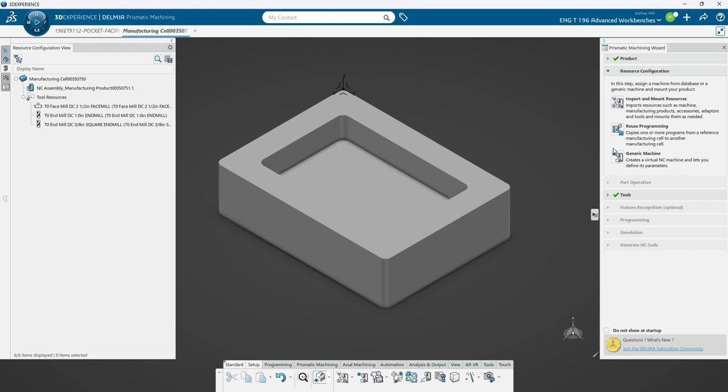So the first thing we're going to want to do is we're going to pick our machine. We're going to grab this generic machine right here. 3-axis will do just fine for this operation.

Next, we're going to want to pick our rough stock. So we'll come in here. Rough stock is going to be basically what's a bounding box, or also known as just the rough stock. You would machine this from a piece of rough stock. You've probably already flattened it and you would just do basic contouring and stuff like that.

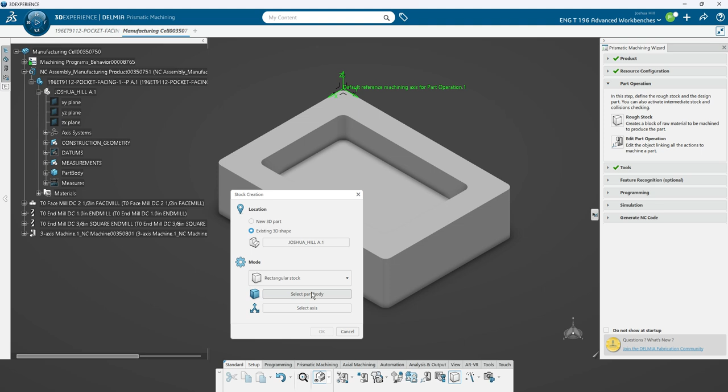Now what we want to do is we want to make this just a little bit bigger. So we can go 8.5 by 6.5, and we're going to make this 2.

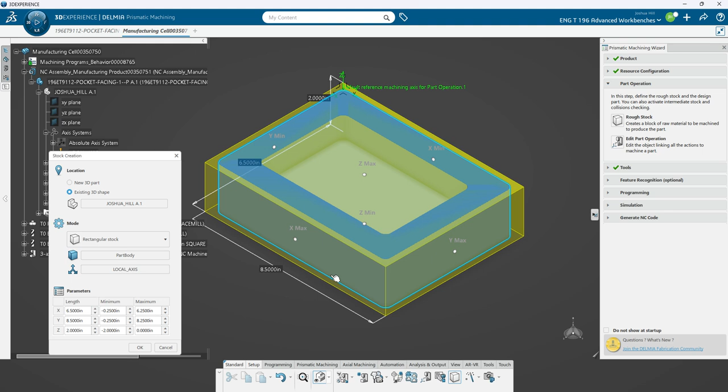And what that's going to do is that's going to create a bounding box, or a piece of raw material around our part, so that we can put this into a vise and machine off the parts that we need to machine off, subtract the geometry here that we need to subtract in order to get our final product.

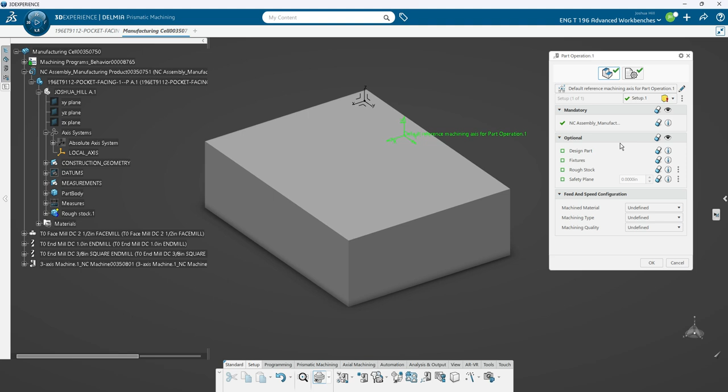So we'll select OK. Next we'll edit the part operation. We're going to select which axis we want the machine to reside on. We're going to pick this upper corner here, right here in our stock, because that's where we want the machine to start.

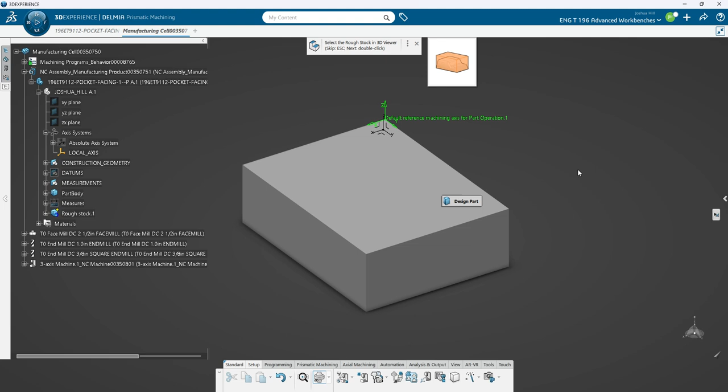Next we're going to pick our design part, which is our part body. Double click off in no man's land. Next we'll pick our rough stock, which is right here, we just created. Next we will pick our safety plane.

This is something I created beforehand. This will let the machine know where to retract back to. And then what we're going to do is we're going to put a -1 inch. I want this machine to come back. I've been having problems with it going through the part, so just to be on the safe side, we're going to put it at a -1.

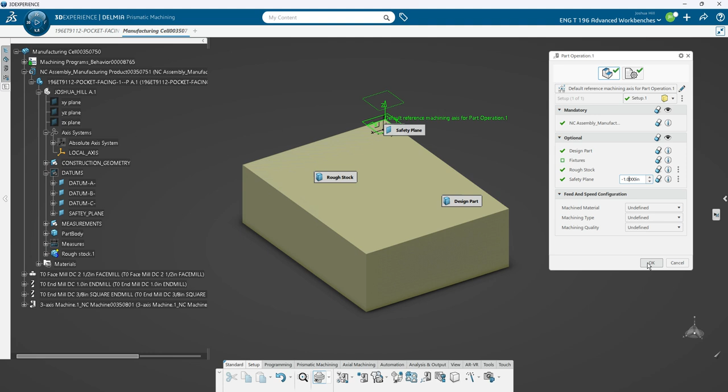Next thing we're going to do is we're going to come down here to our programming. We're going to pick Prismatic Machining, and the first thing we're going to pick is facing. Now here it wants us to pick our tool. So we come over here to the tools that I created, and we're going to use this 2.5-inch face mill.

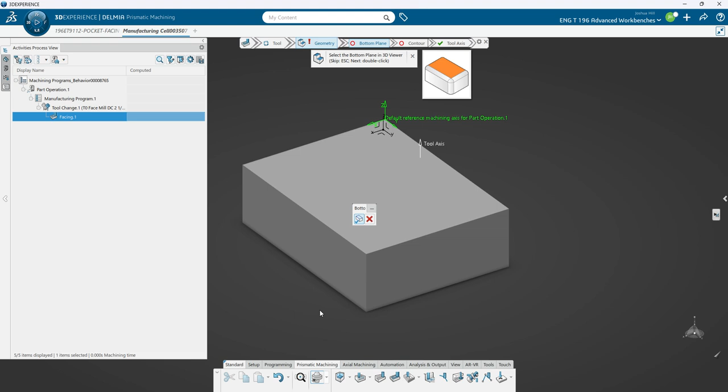Next it wants to know the bottom plane of what we'll be doing. So we got to hide our stock, because it wants to know this surface right here. That's where we want it to stop. The second thing we want to do is we want to show that and select our top plane. Now this is our top plane. This is where the machine's going to start.

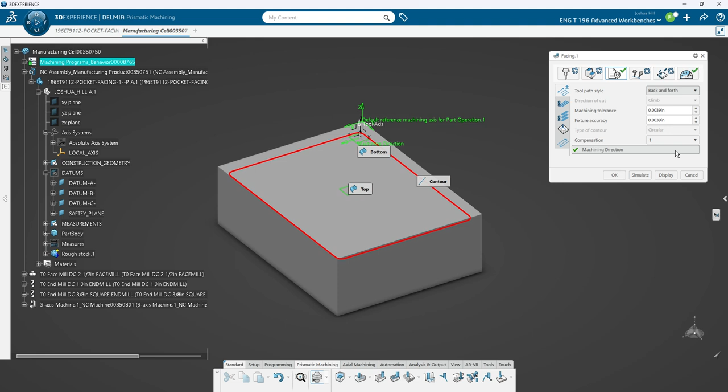Next we're going to set up our geometry. We want to do a backwards and forwards, and we want to select the direction. So we're going to select this direction. You can see here, barely see there, it's a little arrow pointing in the opposite direction. We're going to reverse that direction and select OK. Now the machine will come back and forth like this.

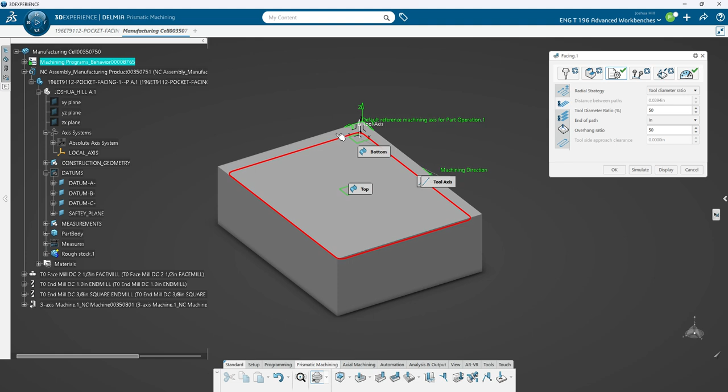Next we want to do an overlap, because the tool will overlap each other, because you only want to engage about half of the tool's cutting diameter when you're making cuts. This will help with the finish.

Next we will select a number of levels to go down. We'll be going down 1/4 inch basically. So we're going to select 4 levels. We could actually probably do 3 levels.

And then a finish pass of 0.010 of an inch. We will go back and forth. Everything else is set. Feeds and speeds. We've pre-calculated and found out all these feeds and speeds.

You would have to set up the formulas to calculate these feeds and speeds, but I've already done that for us so that we can make this simulation go a lot quicker.

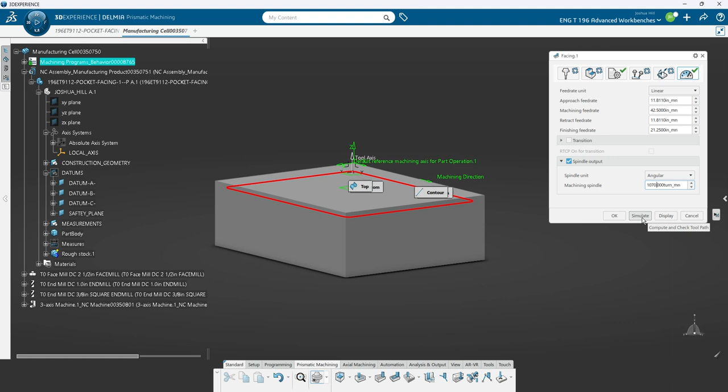Let's simulate this really quick. You see the machine's going to come down. You see this tool path? It's going to go back and forth.

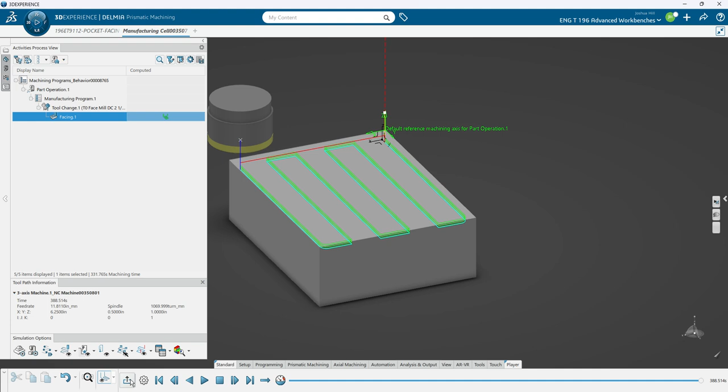There, it did it. It was really quick, but that should be enough to show us that we've got a good tool path. We'll select OK.

Next we'll want to create another operation. In this operation we're going to do a contour.

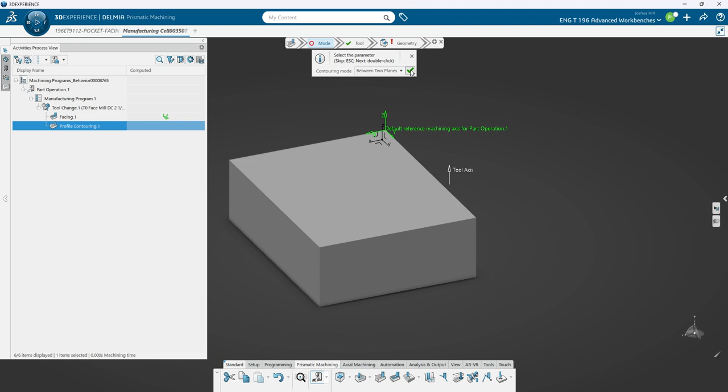Select between two planes. Since our facing mill is going to take us down to the other plane, we need to hide our rough stock again. This will be our bottom plane right here, and here will be our top plane.

Next we'll pick a strategy. We don't want to do zigzag, we want to go one way. We want this to come around, go around the circle.

We can come down in 3 levels, yep, with a finishing pass on a side finish.

And speeds and feeds on this one have changed. We can change this to 70, change this to 35, and change our spindle speed to 6,000.

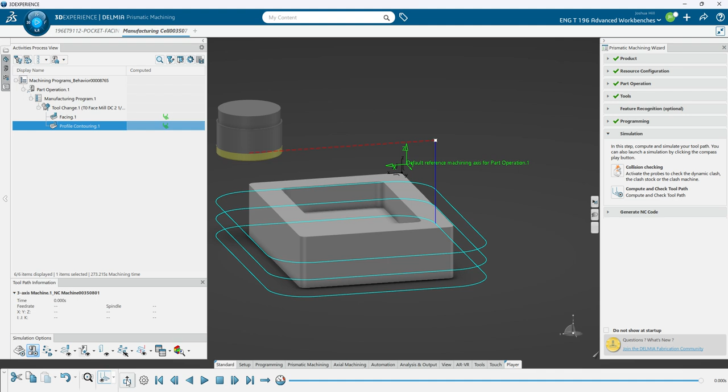What we've got to do here is make sure we've got this in the tree. Yes. Now we need to select a tool.

So we need to edit this. Let's select a tool. We're going to select a different tool. We're going to use this 1-inch end mill.

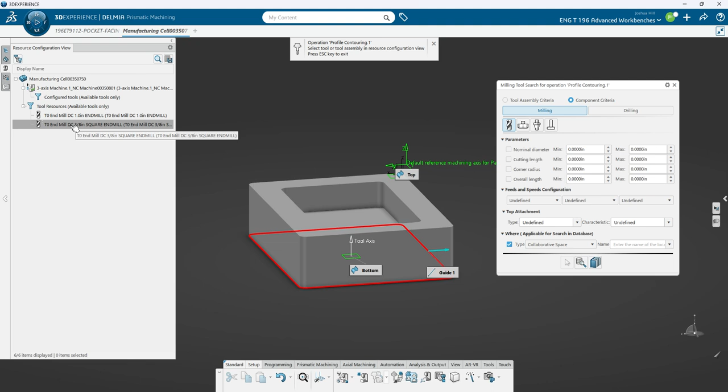Select simulate. Now you can see it's going to be a 1-inch end mill. It's going to come and contour around this edge. It's going to go fast, so don't blink. There you go, that confirms it.

We're going to exit out of that. We're going to say OK. And now we're going to add one more operation.

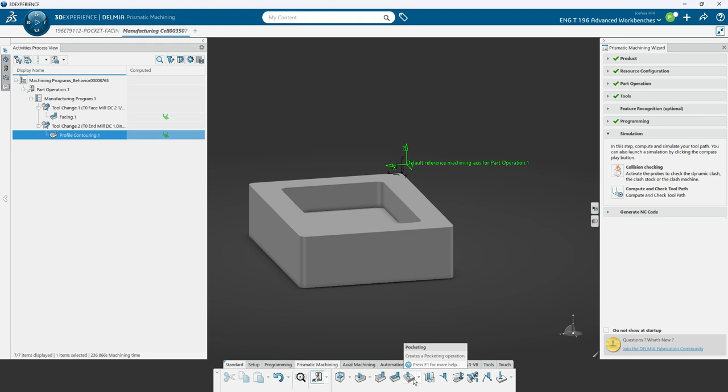This last operation is going to be pocketing out this middle pocket right here. So for this, we want to select the bottom here, then we want to select the top surface, since we've already machined down to the surface and machined around the outside already.

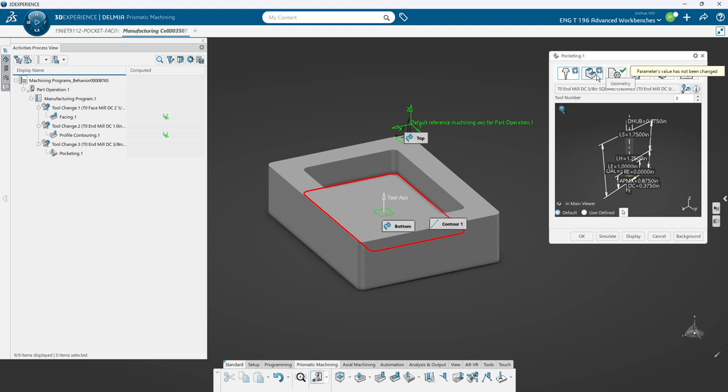The tool we're going to use for this one is going to be that 3/8 square bit, or square end mill. Next, we're going to select closed pocket.

And then we're going to pick our strategy, helix outward, which will work. We'll come in the middle and work our way out.

Tool ratio by 3%, yes, overlap's good. Number of levels, we'll increase this one to 4. And we will also put a finish pass of 10 thou, yet again.

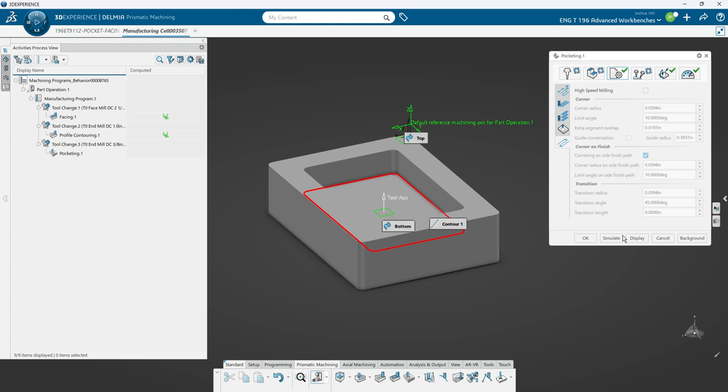And our speeds and feeds on that one are just the same. You can see it's going to come in, helix in, and pocket down.

Alright, we've confirmed that. Now comes the fun part. We get to select OK.

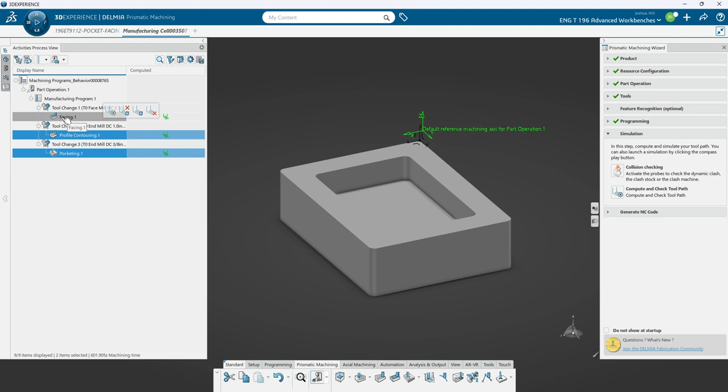Now we're going to come over here. While holding control, select the pocketing, the profile contour, and the facing. And we'll be able to compute and play all 3 of these.

So as you can see here, the machine's going to come in and do all 3 of these operations. We're going to select it so that we can see the material leave us, and we're going to enable the master clock.

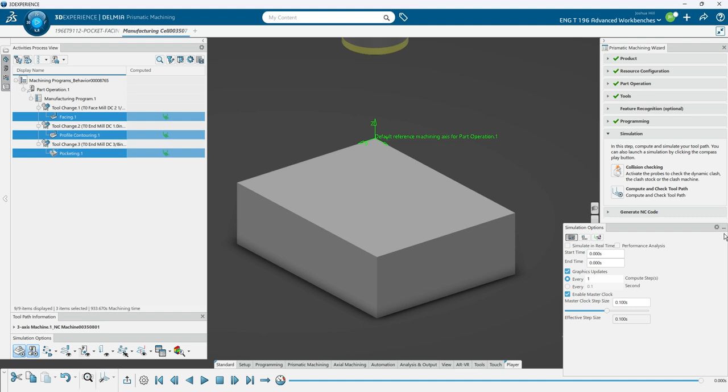We'll close off some of these screens so everybody can see what's going on here. And we're going to start playing.

Here comes a 2.5 inch cutter. It's going to make its cuts all the way down to that surface, and then the last cut is going to be that 10 thou finishing surface.

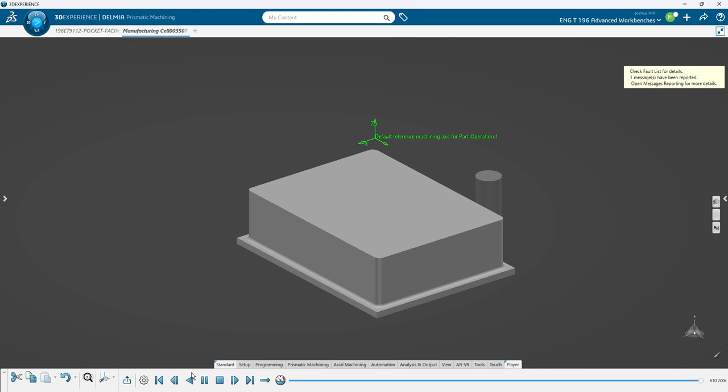Then we use the 1 inch end mill to take the profile around the outside, and then we take that 3/8 end mill and create the pocket on the inside.

As it goes down, it does a finish pass each pass, and then at the bottom it'll finish it in the bottom.